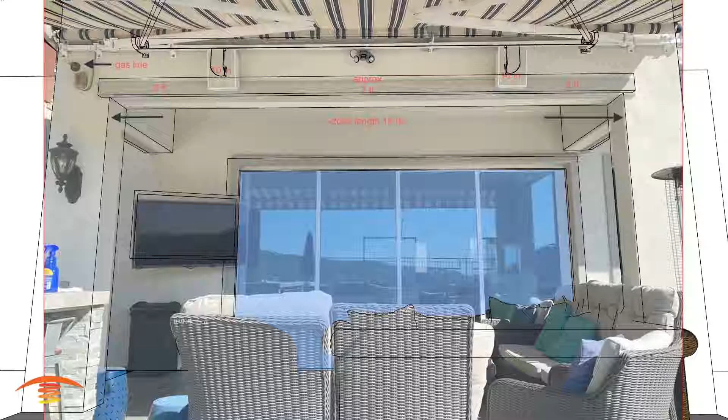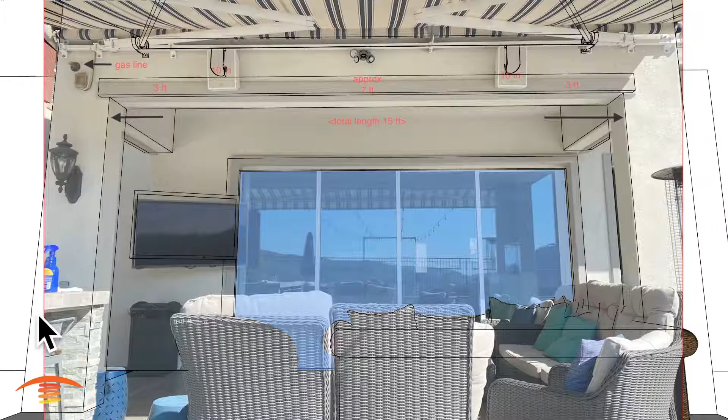Now let's get heating. Alright, so here we have this residential application, and you can see here we have this retractable awning up here, a few speakers, a light, and then they have a gas line up here, so I'll show them a gas option here as well. TV set back here, and then basically they just have reclining space over here. It looks like there's a countertop or a bar stool area over here, but we're just going to concentrate on this space right here. So let's go ahead and see what we can do.

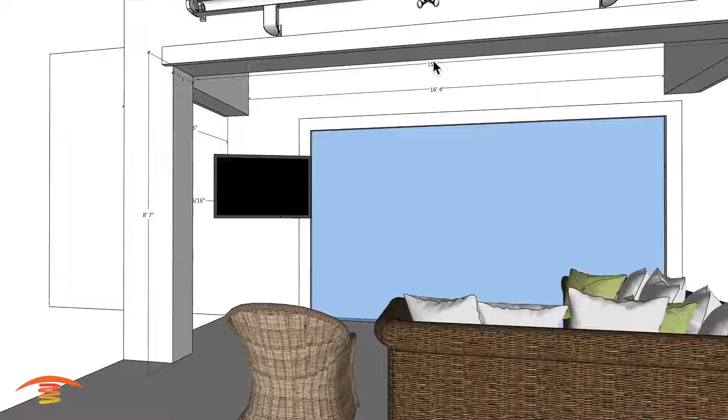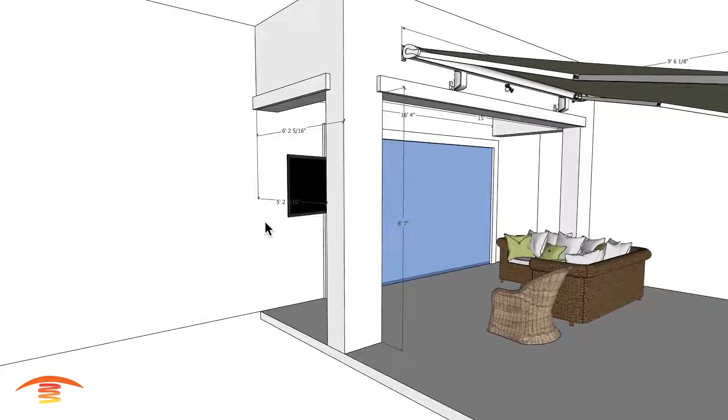And let's go ahead and put the dimensions on first. So overall dimensions I have, this opening here I have at 15 feet. Now that's the only true dimension I received other than the placement of these fixtures. So I have a guesstimate of 8'7" to the floor from this beam going across here, and then just some other items I have: 16'4" from inside edge to inside edge, and then a depth here of about 6'2" to the outside wall from the inside wall, and 5'2 5/16" from this inner beam here to here.

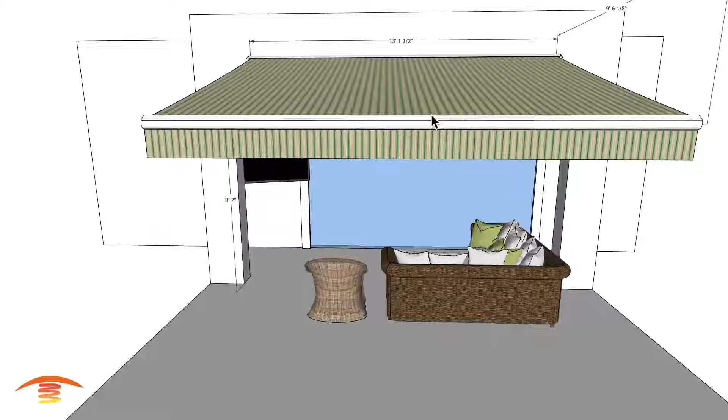And the awning structure, there's just some dimensions. Obviously the dimensions are wrong here because they need to be wider, but this is just for show purposes, and that's about it. So the one issue with placing a gas heater here is that you need to have a certain amount of clearance. So let's go ahead and just throw a gas heater in here.

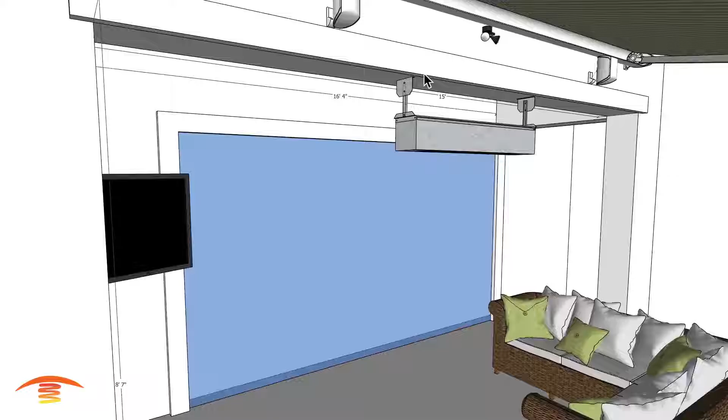So this would be an S25, and it requires 9 inches of clearance above. It's 8 inches of heater, so that's 17 inches total of drop, and that would probably put it down pretty low. Let me just place a marker here, see what we got as far as height is concerned. So 7'2" off the ground. Now that's not terrible for an S25, but it would be kind of intrusive, I think, in the patio.

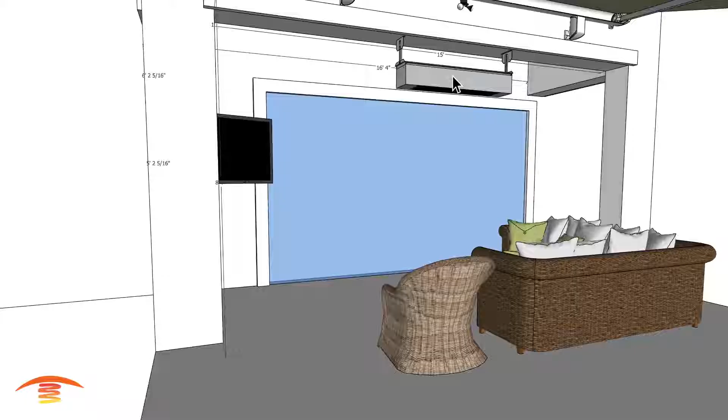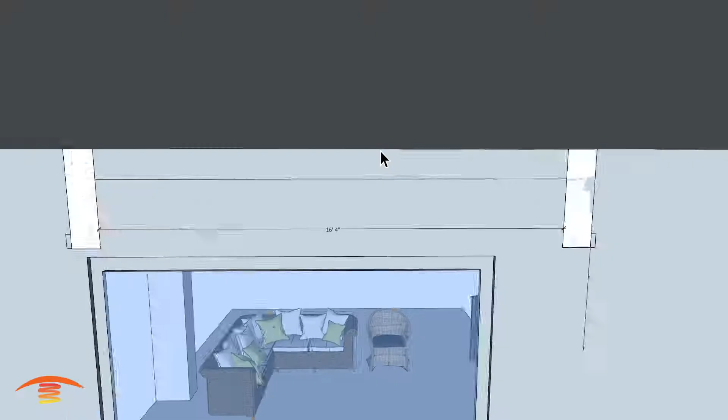So if you're looking outside, now I'm not sure I can do this here, but let me just pull this wall out a little bit more, and we can see here, if we were looking outside now from the structure, we got this heater that we're going to be seeing. Let me turn that off for a second. Yeah, so we'll be seeing this heater, but I don't know, maybe it'll be a little camouflaged by the awning, but not quite sure.

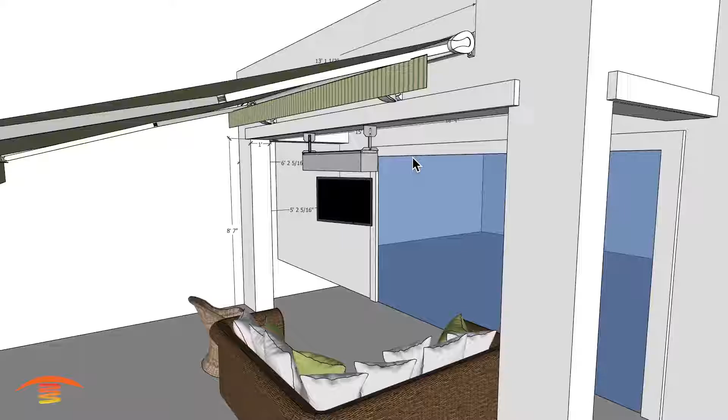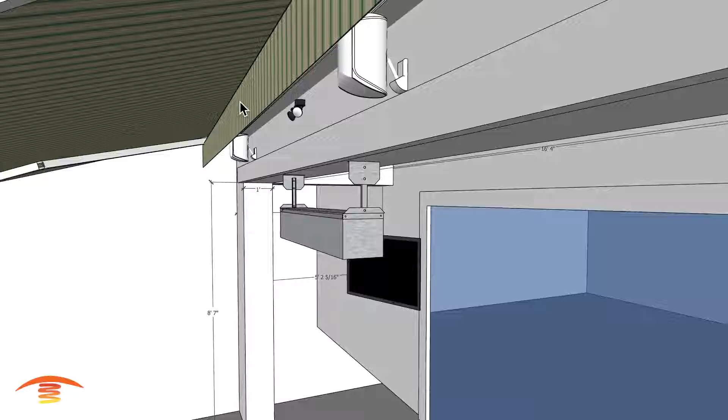One thing that we have to take in consideration, however, is when this awning is retracted all the way, what happens to the, I'm going to call it a little flint or fringe here, which is the material that drops down over here. So this material, if I move it back up to where it would retract from, and we do need to make sure that we are clear from any combustible. So with the heater down here, there's not a problem, but if we attempted to put a heater on this wall here and point it out or angle it or something like that, then we have a big issue with regards to clearances, and that cannot be done. So this would be the only option I can really come up with a gas heater.

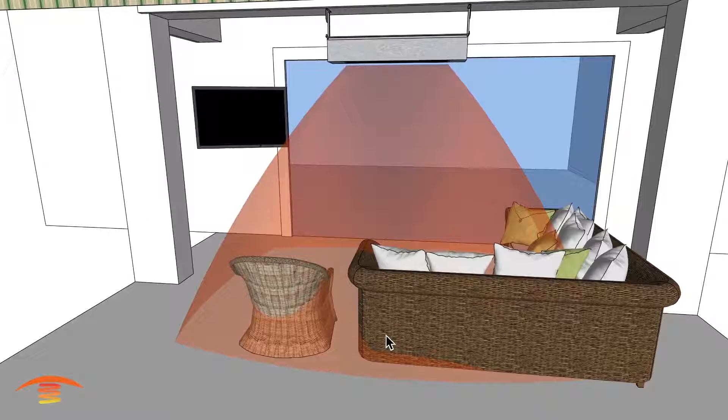Let's go ahead and look at the footprint of heat. So I'm going to turn off that. So here's the footprint of heat. You can see with this 25 in this position, it's fairly okay. You'd probably have to move the couch a little bit during those colder times of the year, so you get more coverage on top of you. So let's just go ahead and do that and see what it looks like, and we'll move this just a couple of feet over here. That's something that you'd have to do.

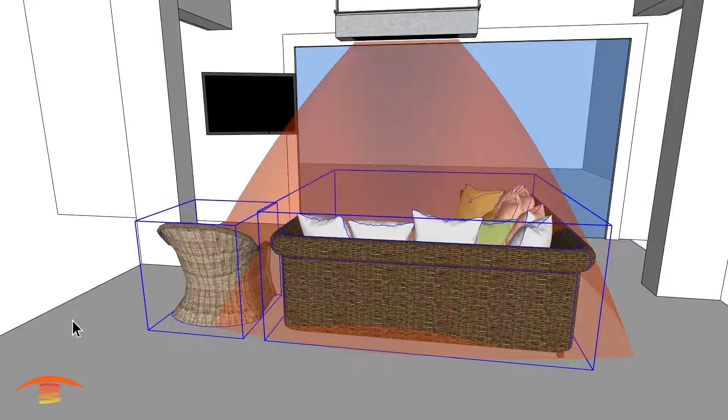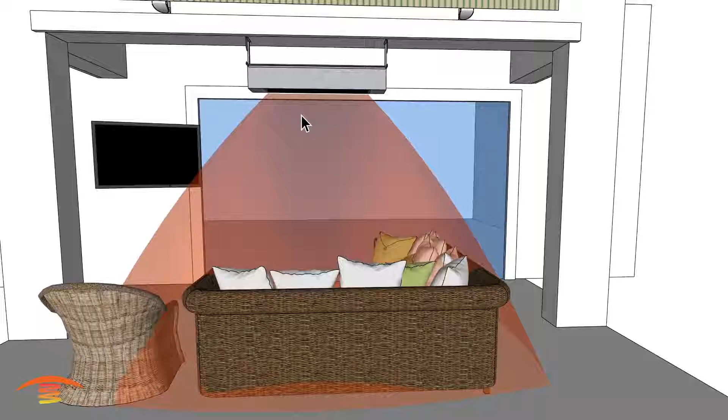So that's 2 feet over, 24 inches. Yeah, I would still say this would be okay, but not perfect. Again, we're not hitting the backs of this chair here, so you'd have to move it a little bit closer inwards as well. And so essentially what you're going to get is roughly a 9-foot throw this direction, and about a 10.5 to 11-foot throw this direction. So you're not going to get a whole lot of coverage. Now you could put additional units in here, but I think that would be kind of overkill. So that would be one, and this is just centered in the space here, centered between this beam here going across, as you can see back here.

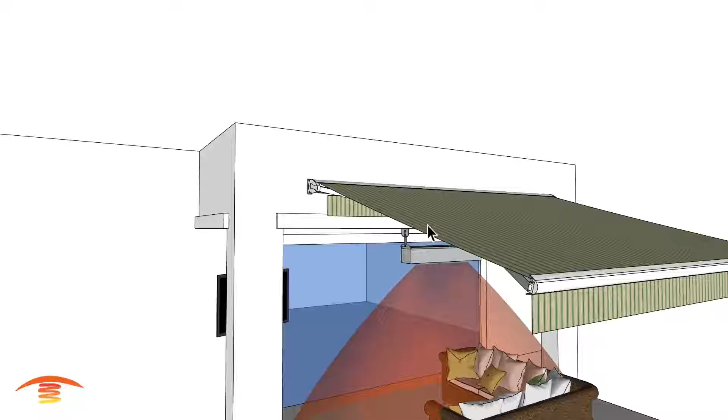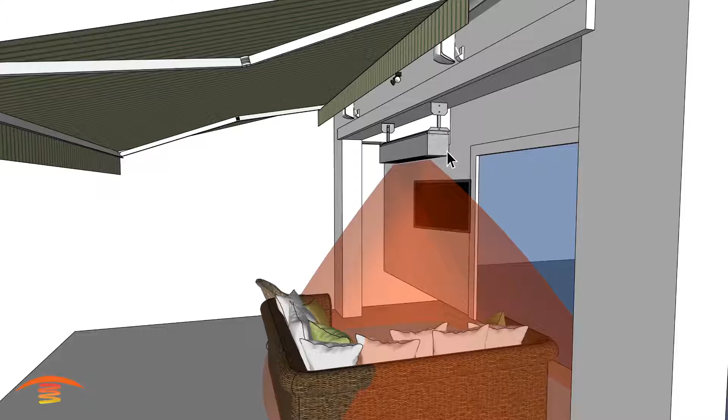So it's just centered, and with the 9 inches of clearance on a 25 pointed straight to the ground. Once you angle this heater out, you have to increase the clearance by 4 more inches. So that's why I didn't do that. And then plus the heater itself, when you angle it, actually adds a little bit of a dimension from the angle being down a little further. So I'd prefer not to do that if I could avoid it.

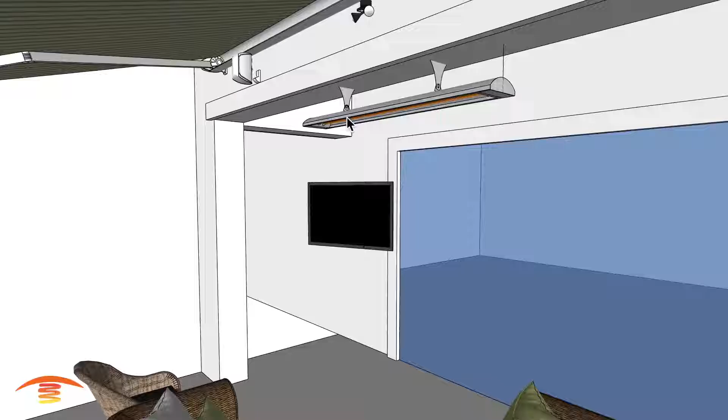All right, so that would be the Sunpak S25, and I'm going to turn off this fringe up here. We already talked about that, and we'll turn off this gas heater here. This is the Sunpak S25, and we'll go ahead and put on an electric heater, which might be another option. So this would be an electric heater. This is a CD 6024, 6000 watt, 240 volts. I'm going to move it down a little bit here, and I don't have it attached properly. There we go.

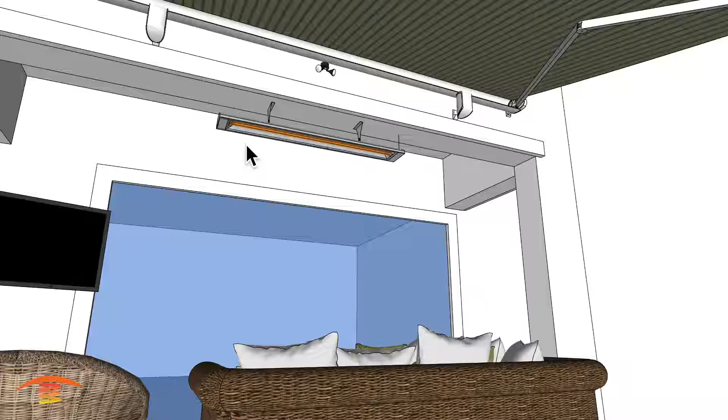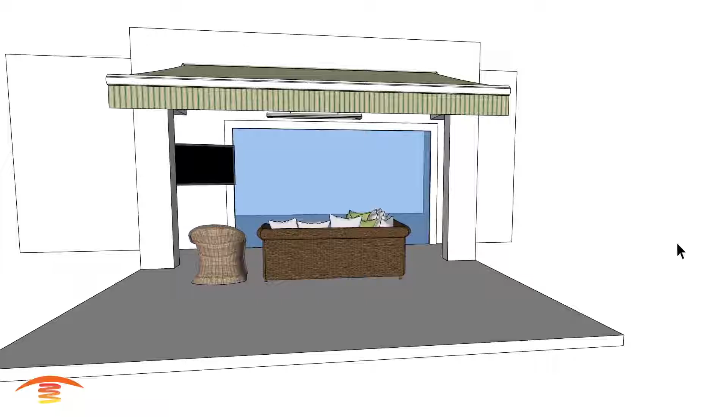All right, so this is 6000 watt, 240 volt, dual element CD 6024, and it has 6 inches of clearance above, and then it's about 3.5 inches in height and 8 inches wide this way. I have it in the center of the patio again, just like the other one, so it's just a little bit less obtrusive this way, I think. And we'll go ahead and look at the footprint of heat. It's a little bit less of a footprint of heat, because of the fact that it's lower than it should be.

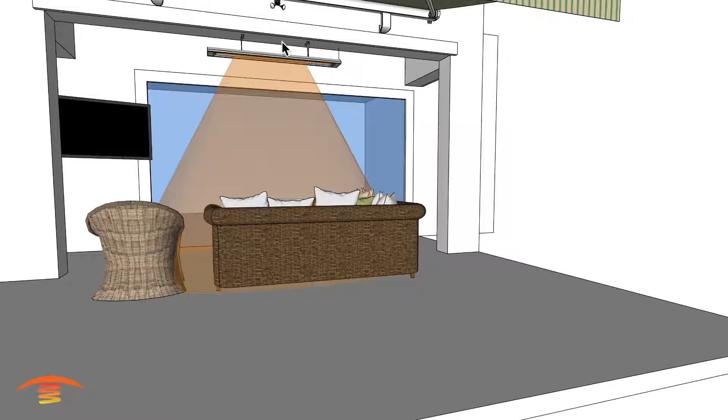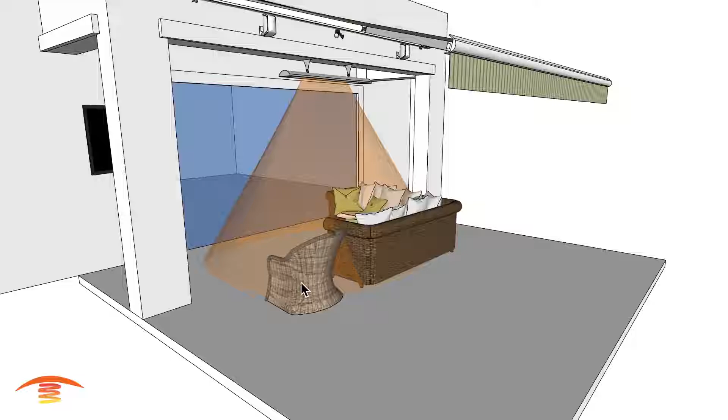Again, the 6,000 watt unit really needs to be probably about 8 feet off the ground to 9 feet off the ground. Maximum of 10 is what I would recommend, and then you'd get a wider footprint of heat this way. So with this, you're only getting probably about an 8-foot throw here, and maybe 7-foot throw this direction.

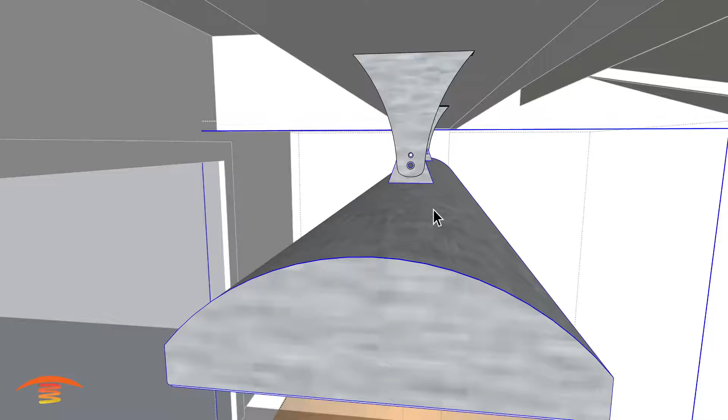Now you can angle this particular heater, and that's what's kind of nice about it with regards to that fringe. If we had that fringe here and we were to angle this heater, let's go ahead and just do that, and we'll go with roughly maybe a 15-degree angle. And you can see here that our footprint of heat is a little bit better off.

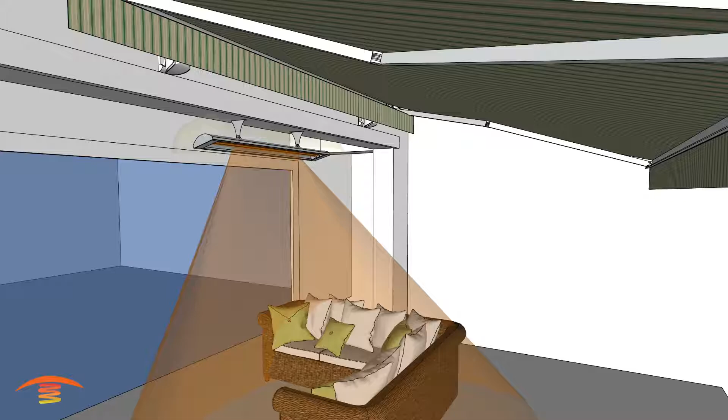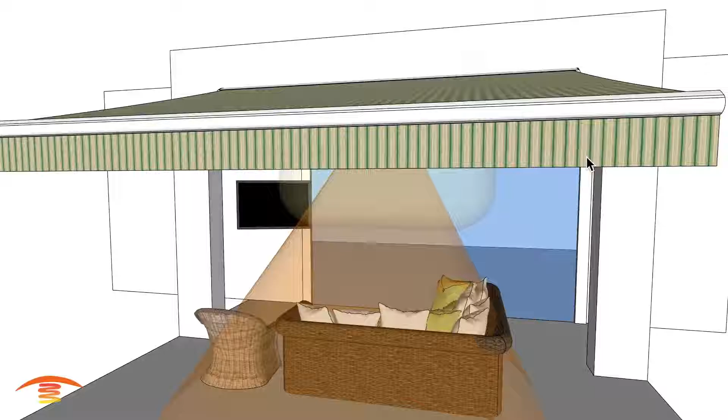And then also, let's look at the clearances above the heater. No problem with that. And then there are clearances below the heater. So below the heater, we're still missing that fringe, and that's the dimension that I'm kind of concerned about, the clearance. So that's 15 degrees. We probably could go to 20 degrees, but then we're going to start missing this side of the sofa here.

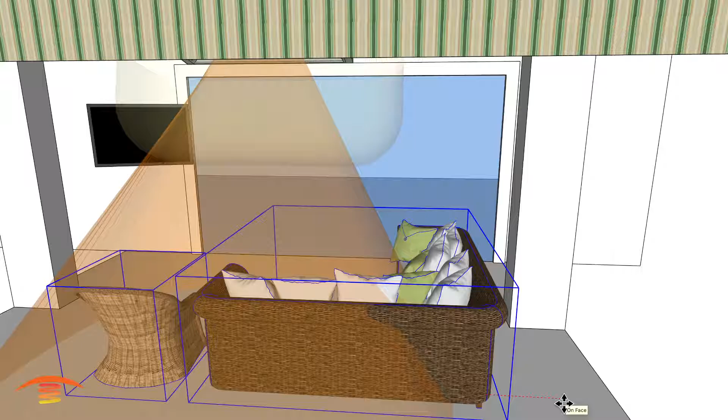And we did move it in the middle. I know that the sofa originally was over to the edge a little bit further. So let's just move that over here to see what that would look like. I'm going to go with the 24 inches. We're not quite touching that, but you can see again, we have that issue with the coverage here. So that would be the 6024. Let me go ahead and turn that off.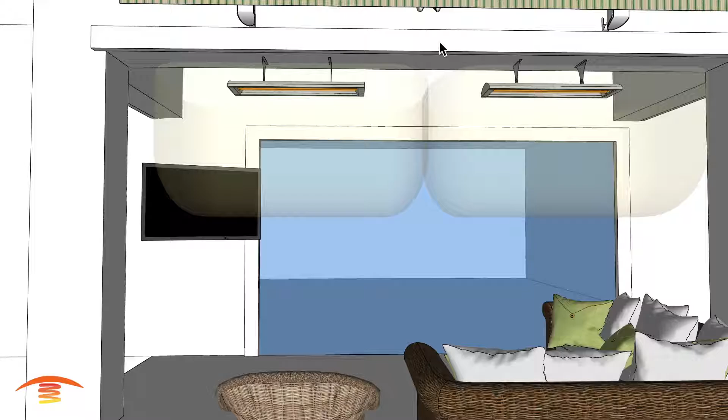And then I'm going to give you one more option, which would be having 2 of the 5,000 watt units. And we have these centered at 3 foot apart from each other. So from center to this end is 1.5 feet. And again, these are the clearances here. We didn't do the adjustment on the angle here, but we have probably 15, maybe 20 degrees that we can come out this direction as well.

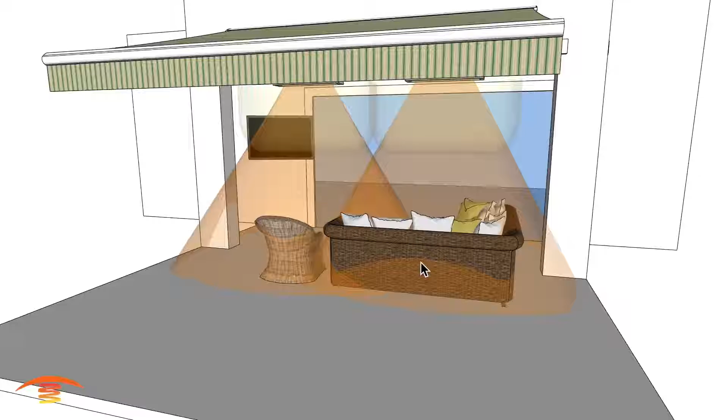And let's look at the footprint of heat here. Now we're getting a lot better coverage from left to right, so we can really utilize this space a little bit better. And I think that's about it. So I'm going to turn that off for right now, and just look at the view that we might have out here. So you can see that would look a little bit better and give you a better coverage overall.